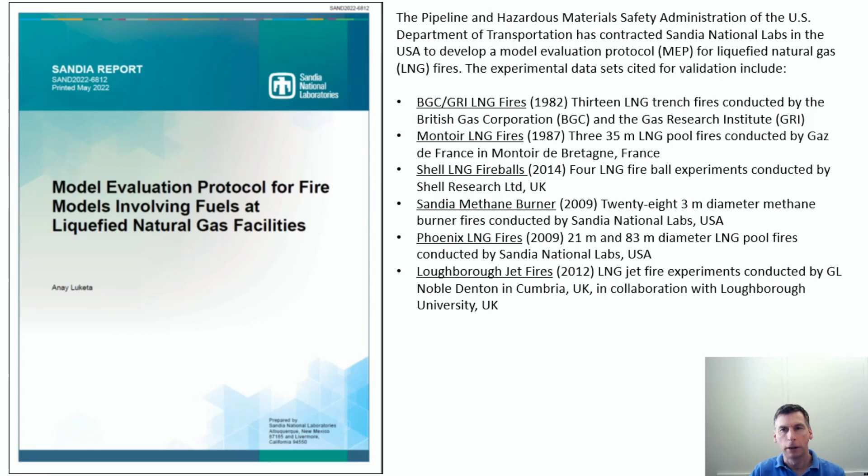Before I get going, let me acknowledge Luketa at Sandia for doing a lot of the work. She set up all the FDS calculations originally. She dug up all these old test reports and pored through reams and reams of data to put this together. And she is the author of the report. As all of you know who've ever done validation work, it is a tremendous task to organize all this material, especially when it's 40 years old. And you'll see from some of these documents that I'm showing that this work was really pulled out of mothballs.

Okay, so I'll start by going back in time 40 years to look at some experiments that were conducted by Croce, Mudan, and Moorhouse on behalf of the British Gas Corporation and the Gas Research Institute. For any of you who have had a background in fire science, and especially big pool fires, these names should sound familiar to you. You'll see them in the SFPE handbook. They developed a lot of the empirical correlations that are still used today for evaluating the hazard from large outdoor fires.

So in these experiments, there's a trench, shown here in this picture, if I can bring up the pointer, okay. So we have this trench. The trench is flexible, so it can be changed in size for the different tests. It's about 50 meters long and some 30 meters wide, but these dimensions will change from test to test.

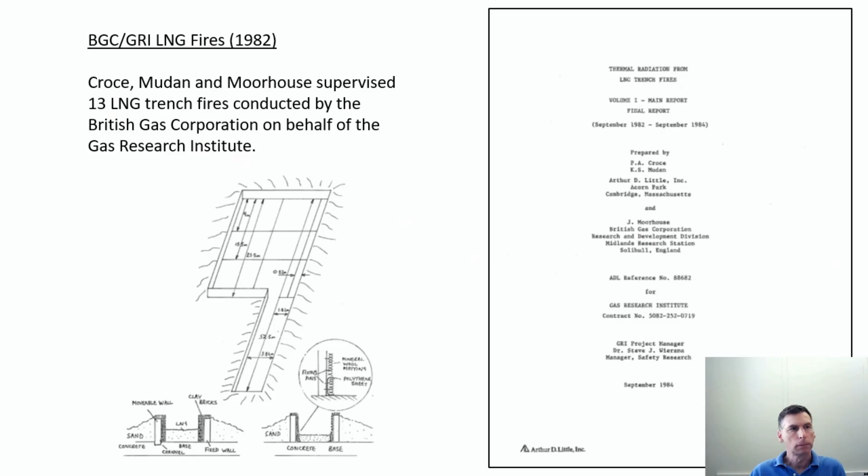Okay, the FDS simulations of these experiments were fairly straightforward to set up. You have a rectangular pool. The trench is filled with liquefied natural gas at a certain temperature. You're given the burning rate, and you position in the vicinity of this fire radiometers, both in the downwind direction, in the upwind direction, and in the lateral direction.

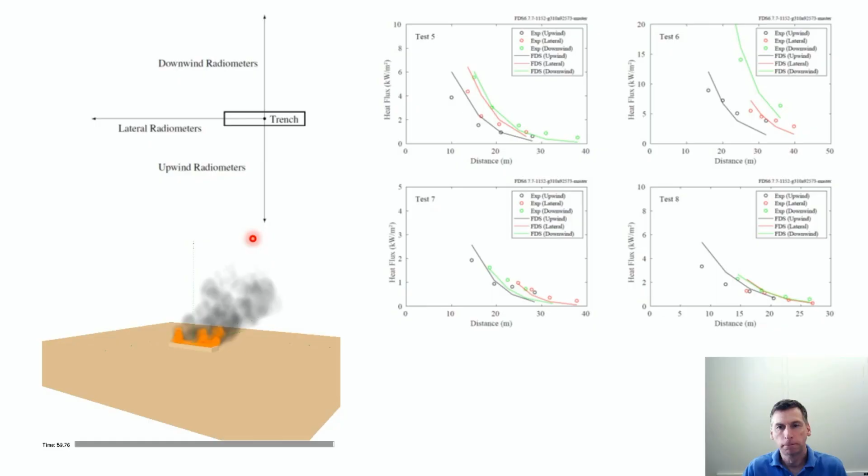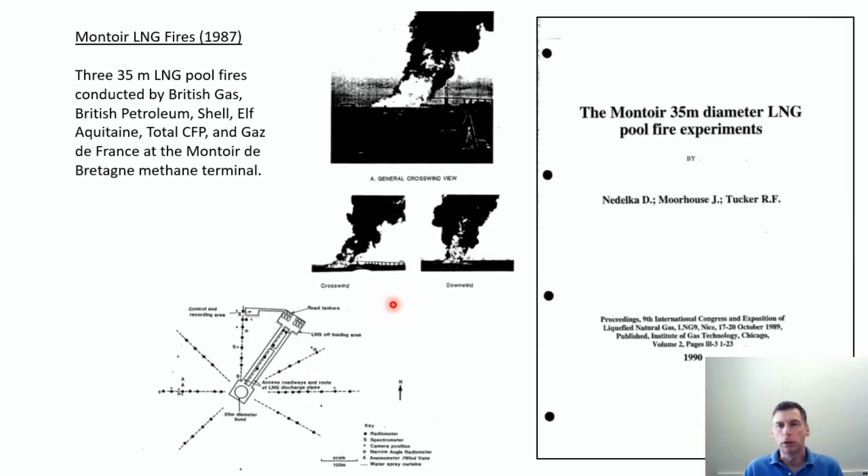So one of the big issues that you have to keep in mind when you're doing these kinds of simulations, where you have a fire surrounded by heat flux gauges or radiometers in the far field, these are challenging because the FDS radiation solver discretizes the radiation heat flux into essentially discrete bands or directions.

So imagine if you took the unit sphere; by default we divide the unit sphere up into 100 solid angles. And the further away from the hot stuff you go, the more obvious it becomes that you have discretized the radiation field into these 100 angles. So oftentimes when you're doing calculations like this, you have to increase the number of angles. And how do you know how much to increase them by?

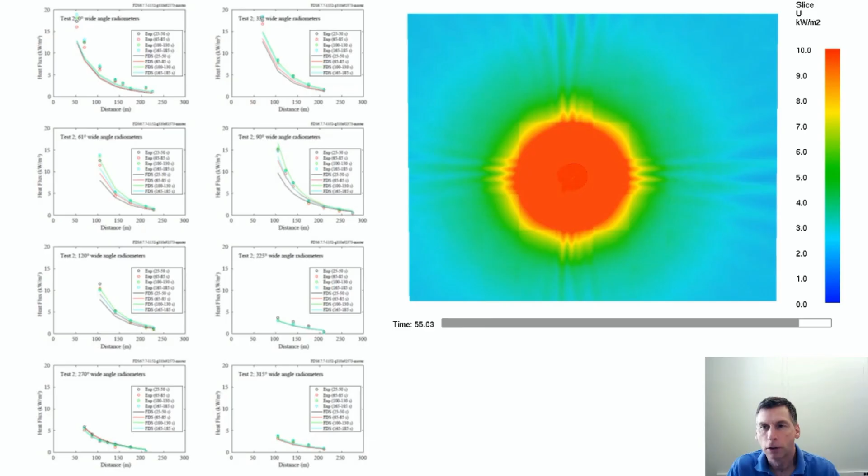Now, in these cases, I'm looking at the steady state heat flux at these points, so I'm able to get away with a little bit of distortion in the radiation field, because when I time average it, that distortion goes away. But it's just something to be aware of, and again, I use the integrated intensity as a good indicator of whether or not I'm resolving the radiation heat flux appropriately at a given distance.

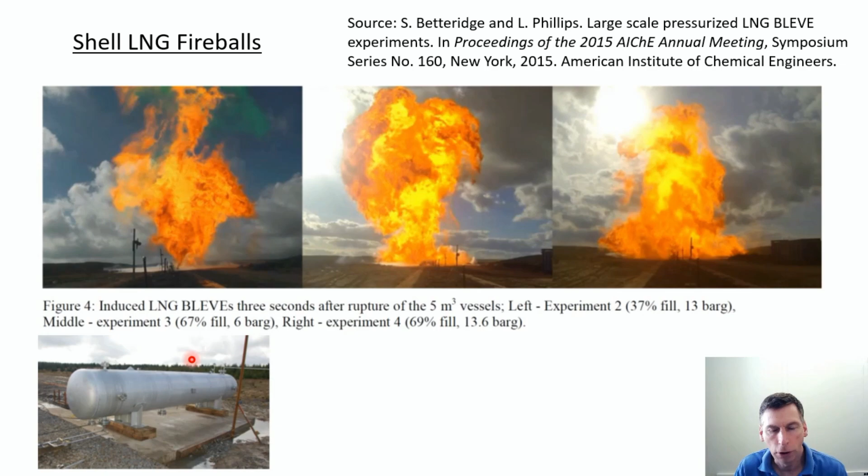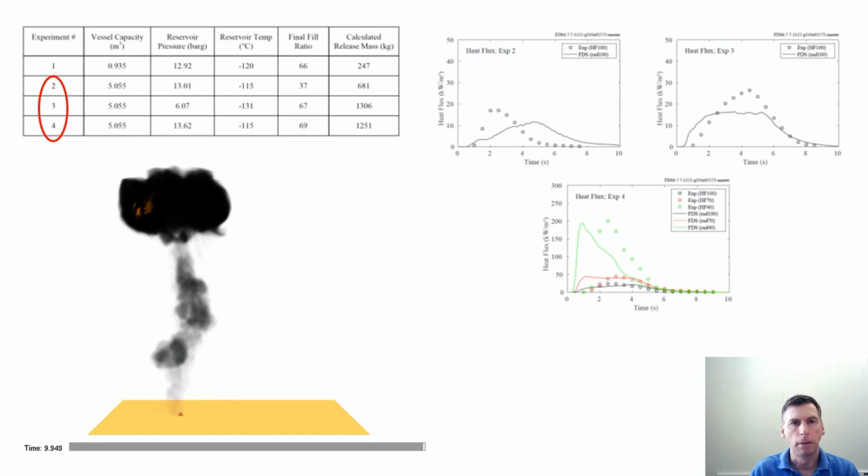Now, there were 4 experiments conducted. We chose to simulate the last 3, 2, 3, and 4, they're called. In each one of these experiments, they used the same type of containment vessel, but with different amounts of LNG, going from 681 all the way up to 1251 kilograms. So this is a very large amount of liquefied natural gas that is spilled out rapidly onto the ground and ignited.

From a modeling standpoint, these calculations are fairly easy to set up, and I guess it's easy because there's really not a lot that we know about what's going on in the vicinity of the ruptured vessel. All we really know is that we have a large amount of cold liquid that is rapidly vaporized and creates a fireball. So in the FDS simulation, I create a vent at the ground that's comparable to the size of the containment vessel. And in roughly 1 second, I push all of the mass of the fuel through this vent, and then FDS creates the fireball that you saw animated.

In the experiments, they had radiometers in the far field that would capture the heat flux for roughly 10 seconds or so. You can see the plot shown here, experiment 2, 3, and 4. In experiments 2 and 3, we only have data at 100 meters from the source. For experiment 4, we actually have some data that's closer in. A lot of this data is either unavailable or is still proprietary, so we're only able to extract a small amount of it. But nevertheless, it does indicate that the model is doing a reasonably good job of predicting the peak heat flux to these distant targets.

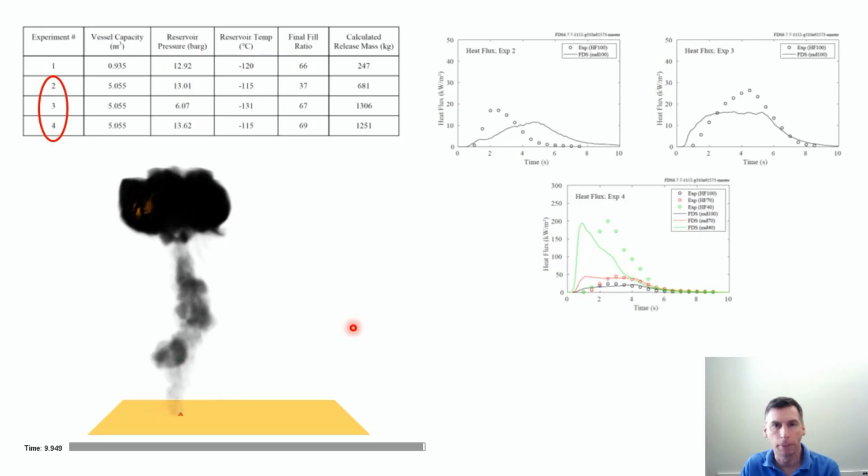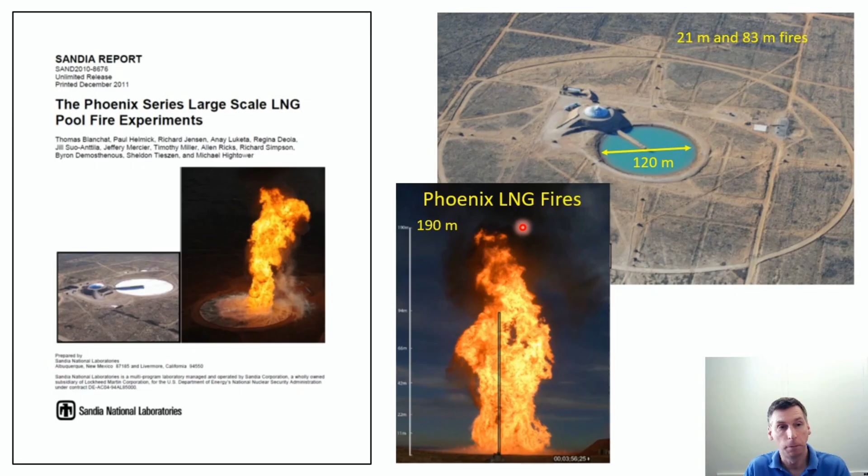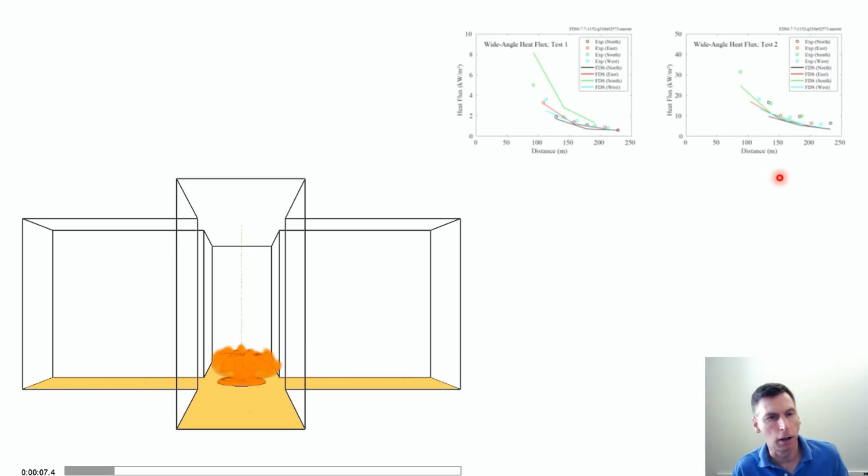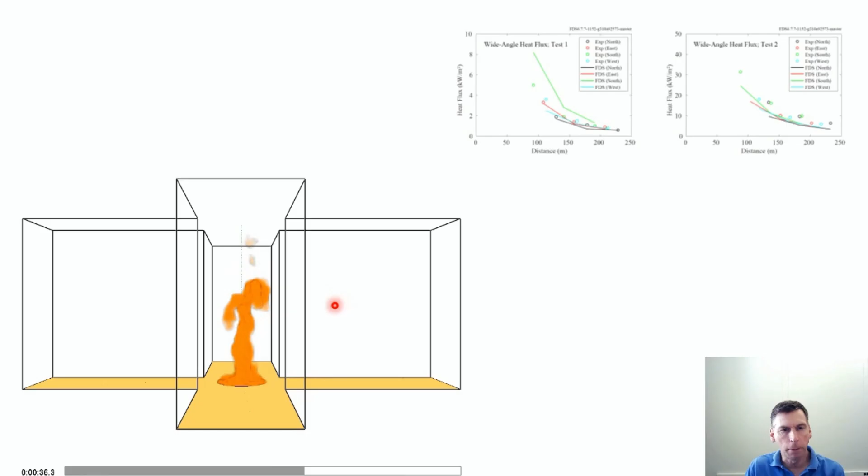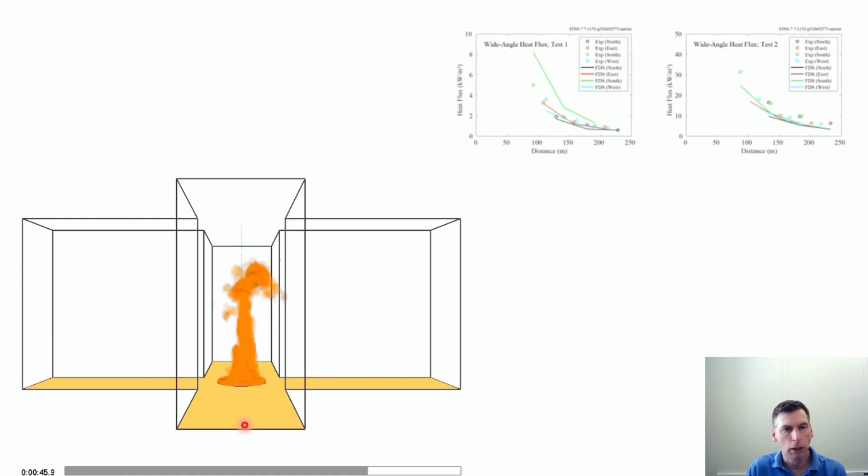Okay, I'm showing the FDS simulation of the 83 meter diameter fire here. This is a very large computational domain, and I've cheated a little bit to save on computational time, and that is I've put a grid over the fire, and then I have created meshes off in the 4 directions to capture the locations of the radiometers. If you do this sort of thing, you want to make sure that each of your radiometers can, quote unquote, see the entire fire. You do not want to cut off the view from the radiometer to the fire in trying to save on a little computational time.

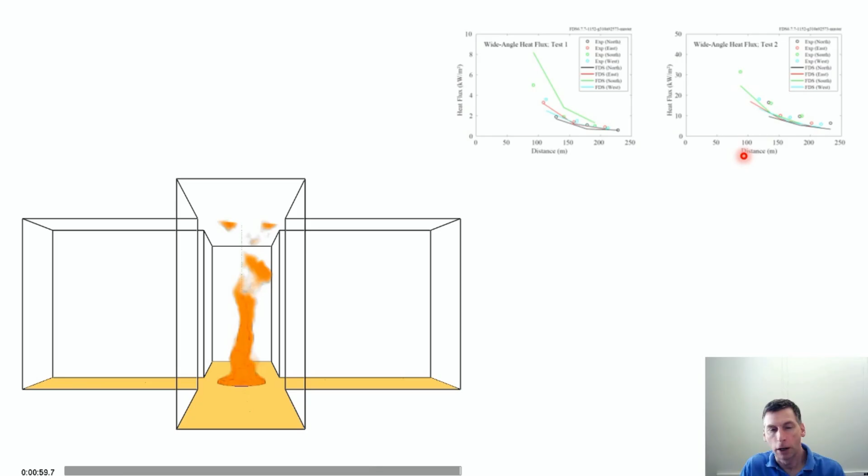The plots that I'm showing here are typical or similar to what I've shown before, where you have heat flux at a distance. One of the remarkable things here is that if you look closely at this plot here in the upper right for test 2, this is the larger of the 2 fires. I mean, we see that we have heat fluxes on the order of 20 to 30 kilowatts per meter squared, a distance of 100 meters away from this fire. So that gives you an idea of how large this fire is when you're 100 meters away and you're still seeing heat fluxes that would ignite a piece of paper.

And while I'm on that subject of distance, another thing to keep in mind when you do these calculations, and I talk more about it in the paper, but I'll mention it here. When you have these large fires outside of a building and you're looking at heat fluxes, you have to account for the fact that the water and to some extent the carbon dioxide in the air that occurs naturally is going to absorb some of the radiation from the fire. So you want to account for that in your calculation, and FDS does account for that. It does do a radiation absorption calculation as part of its solution of the radiative transport equation.

However, you have to pay attention to these large distances because there's a parameter that most people never really have to fuss with called path length. And it's a parameter that's associated with the radiation solver. The path length is the distance over which the absorption coefficient for the radiation solver is calculated. Now, by default, that distance is 10 centimeters. So when we come up with an effective absorption coefficient for what we call the gray gas, which is independent of wavelength, we use 10 centimeters as a path length for that calculation.

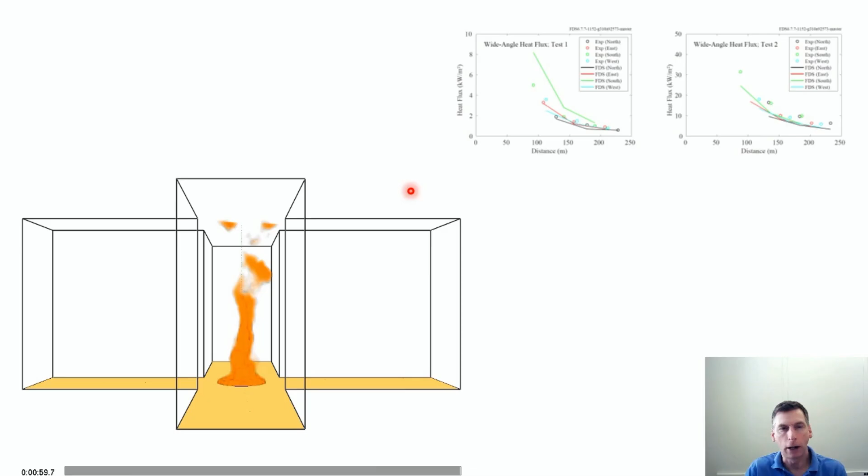Okay, for the next set of experiments, we're back at Sandia National Labs in Albuquerque. They have another facility known as the FLAME facility, or the Fire Laboratory for Accreditation of Models by Experimentation. And this is a very large cylindrical enclosure with a hood at the top for drawing out exhaust products from a fire. And you'll see here on the floor of the facility is a 1-meter diameter hole. And in this case, methane is pumped into the basement of the facility, and it comes up through the hole in the floor and is ignited.

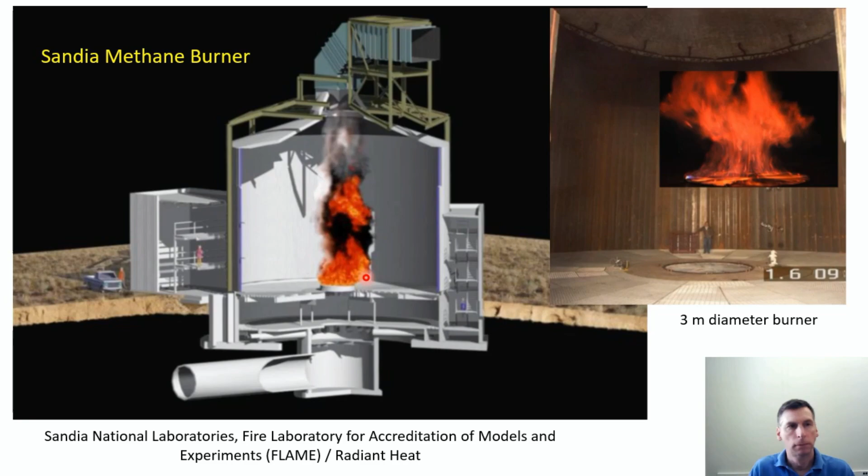Okay, here are some animations of one of the experiments. They actually conducted 28 of these experiments with fires of different sizes. And the objective was to measure the flame heights, temperatures within the plume, and the heat flux to radiometers that were about 9 meters away from the fire.

Now, they used two types of heat flux gauges, a wide-angle heat flux gauge and a narrow-angle heat flux gauge. And you can see the results for a couple of experiments in the upper right corner. Now, the wide-angle heat flux gauge is the one that you're all accustomed to. It's one that has more or less the full field of view. Okay, so whenever you go into a lab and you're measuring heat flux, that's typically a wide-angle gauge.

The narrow-angle gauge is designed to be aimed directly at the flames, and what it does is it measures the radiation heat flux that is emanating from the flame without seeing all the background. Okay, so if you only want to know what is the heat flux coming right off that flame, you use one of these narrow-angle radiometers.

Now, in FDS, the way we mimic a narrow-angle radiometer is, I talked before about the discrete directions that we transport radiation. So when we want to know what the narrow-angle heat flux is, we choose one of those closest to the target, and we only use that to assess the radiation heat flux. In other words, we're not looking at the heat flux coming from cold, distant sources. We're only looking at the heat flux coming directly from the fire and going to the target.

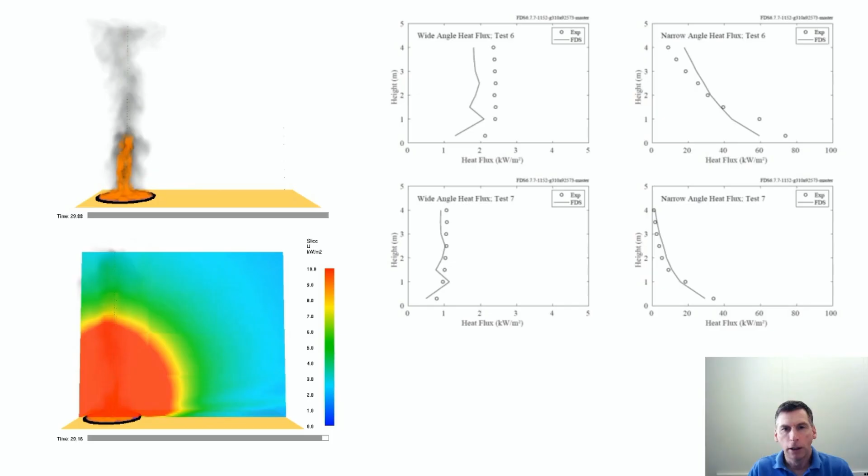Now again, I'll mention here, and you can see evidence of it on the plots. If you look at this animation that I'm showing in the lower left, this again is the integrated intensity. And you can see that when you get about 9 meters away from the fire, you can see the star pattern develop. And you'll see that star pattern manifested in the FDS prediction of the heat flux at about that distance. So you see here that as a function of height, 9 meters away from the fire, the heat flux is roughly 1 kilowatt per meter squared.

You can see that the experimental measurement is relatively smooth, but you can see the evidence of the star pattern in the FDS prediction. If I wanted to eliminate that star pattern, I would have to use more angles, or another alternative is that I could spatially average the heat flux over a couple of grid cells, which would tend to reduce the variation.

Here you can see the narrow angle heat flux for this experiment. And you can see that the narrow angle heat flux is 10 to 20 to 30 kilowatts per meter squared from this distance. And again, that's because if you only look at the flame and you ignore all of the surroundings, you'll see that higher heat flux.

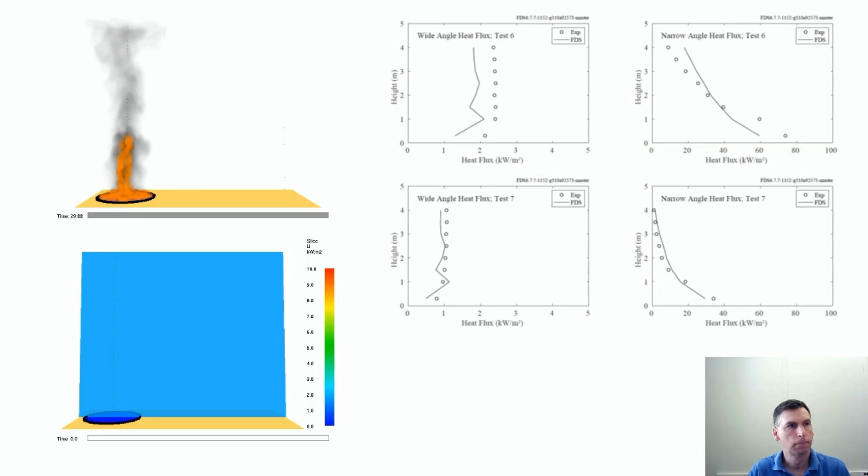Okay, the last set of experiments I'm going to talk about, I call the Loughborough jet fire experiments. Loughborough is the name of a university in the UK, and some researchers at that university supervised and did the analysis for these experiments. So what you see here is a pipe with liquefied natural gas.

That pipe has a small orifice at the end, and the gas is pushed through the orifice at very high pressure, forming a jet fire, which impinges on a cylindrical target. You can think of this as a pipe or something like that. And the objective of the experiments is to measure the heat flux from the jet fire to this target.

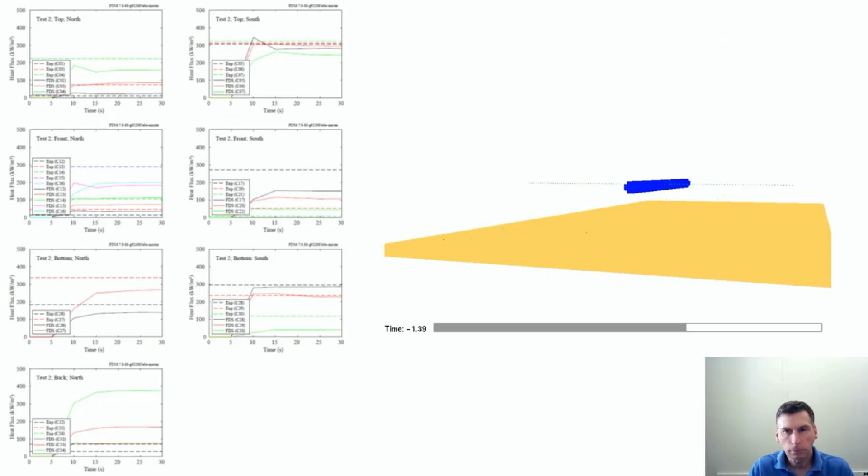Okay, so here's the FDS simulation of these experiments. Now, this is a difficult calculation to perform because FDS does not do supersonic flow. And in this case, the flow coming out of that orifice is supersonic. So the way we get around that is we use liquid droplets which are projected at high speeds from a certain point and given a small spray angle, I think something on the order of 10 degrees.

And these droplets are initially at low temperature, but they have the properties of liquid methane, and they vaporize rapidly and burn, and you get the jet pattern that you see here. The pipe is modeled as a series of rectangular obstructions. Again, that's another big approximation that we have to make.

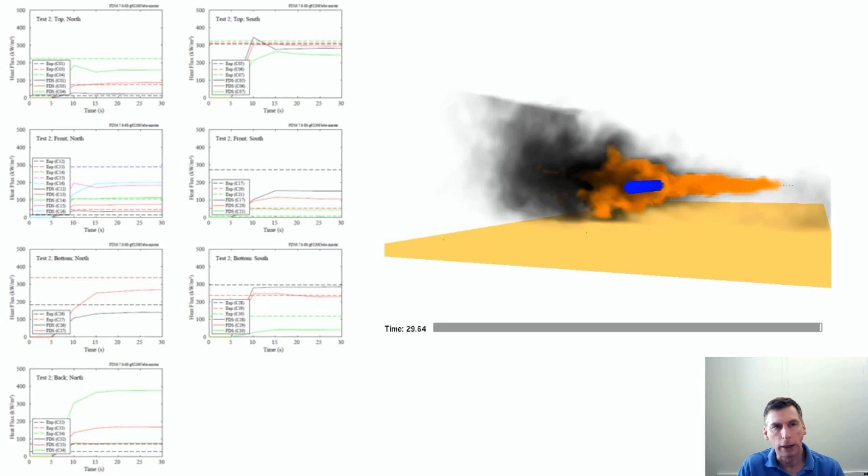It's being modeled as kind of a Lego block collection of rectangular obstructions. And so if we wanted to do a better job of looking at the heat flux to the back, I think we'd have to have much higher spatial resolution and much more detail given to the obstruction. And for these calculations, we just didn't have the computational horsepower to capture both the details of the pipe and the entire jet. But nevertheless, we can assess where the model is able to predict reasonably well the heat fluxes and where it can't.